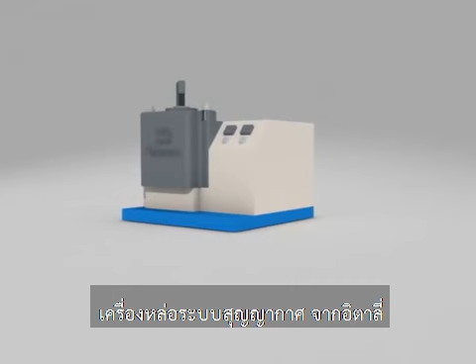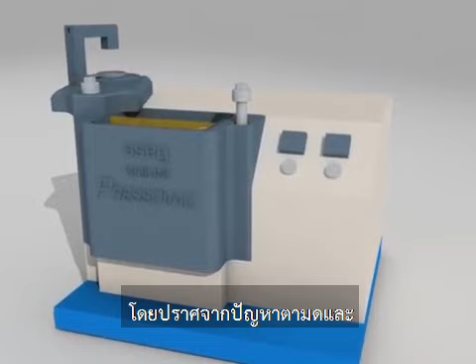The system used by our Pressovac series casting machines was specially developed for dental labs where casting perfection is absolute. Casting pieces have a very smooth surface, a very dense molecular structure, and are without defects like improper filling, porosity, and shrinkage.

Metal is inserted into the crucible and the flask positioned on the cradle inside the casting chamber. The casting cycle is fully automatic.

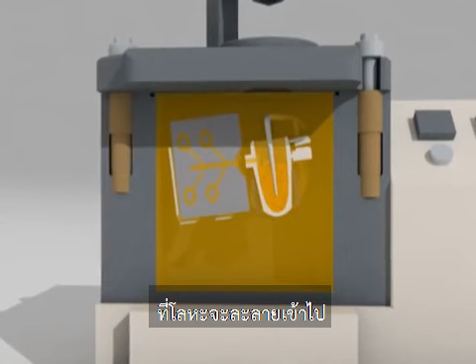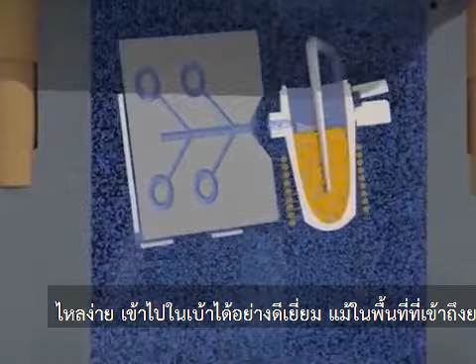The casting chamber is fully evacuated by vacuum before melting, followed by helium gas supply to create an inert atmosphere. Helium gas has an excellent gas fluidity, which provides a cleaning effect of the molten metal and mould, and guarantees a smooth filling of metal even of the most intricate patterns.

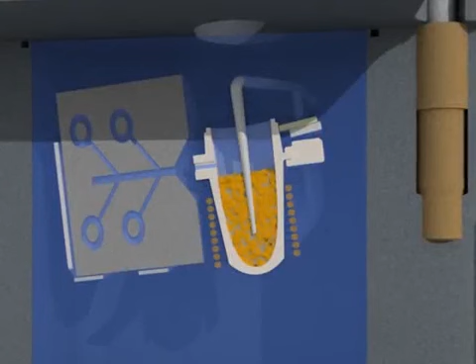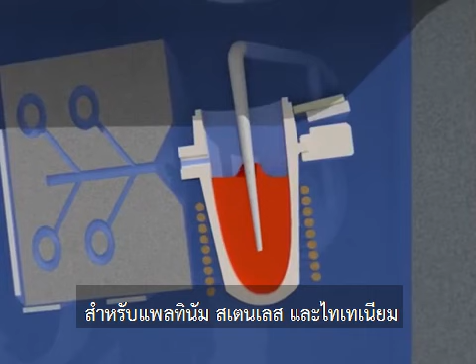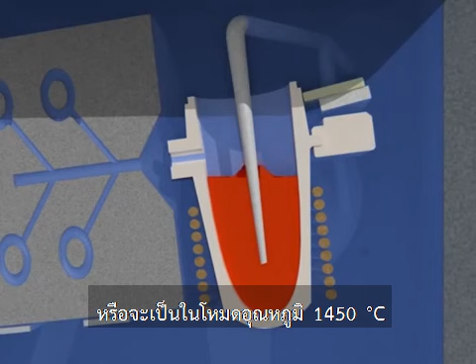The casting temperature is attained, and low-frequency pulses are given to vibrate and mix the molten metal, keeping it homogeneous. Temperature is controlled by an optical pyrometer up to 2100 degrees centigrade for platinum, steel and titanium, and by an immersion-type S thermocouple inside the graphite crucible up to 1450 degrees centigrade for gold, silver and bronze.

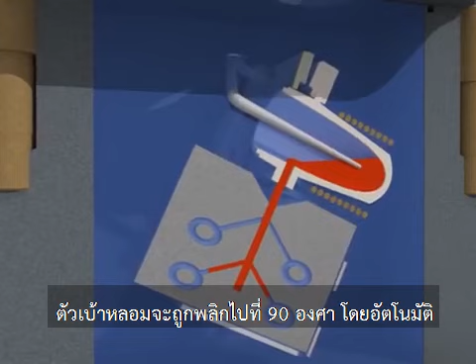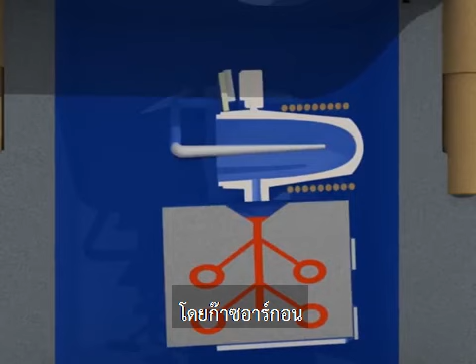At this stage, just by pushing a button, the whole crucible and flask system will automatically rotate through 90 degrees, and the metal, once poured in a homogeneous and controlled way into the flask, is automatically pressurized to 4 bars by argon gas.

This high and quick pressurization is indispensable to obtain a proper and homogeneous filling, even at low metal flask temperatures for gold, silver and bronze alloys, and, above all, for platinum and special steels which have a very narrow melting interval, thus a very quick solidification.

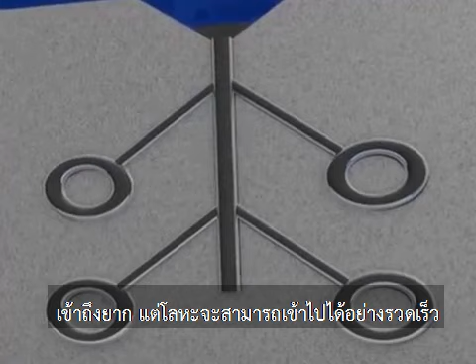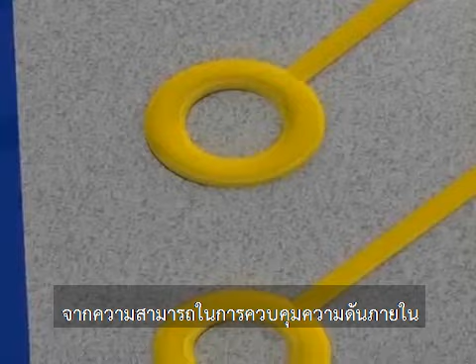This results in a very smooth surface due to the effect of the vacuum, and a dense, well-compacted casting due to the overpressure of 4 bars, which benefits both thick and thin sections.

In most of our competitors' machines, the metal cannot be effectively pressurized up to 4 bars since the machine structure is weak and gas pressure is slowly applied to the molten metal after pouring.

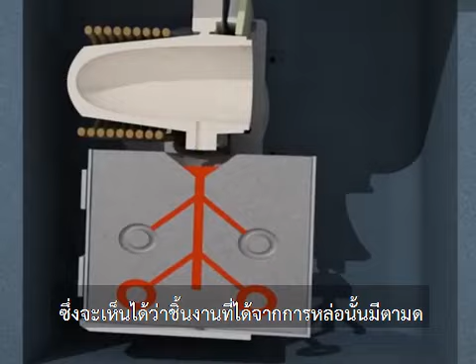This weak and slow overpressure leads to a raising of the temperature of both metal and flask in order to obtain a proper filling of the flask, with the obvious consequence that casting pieces will have porosity and a very rough surface due to the very high temperature.

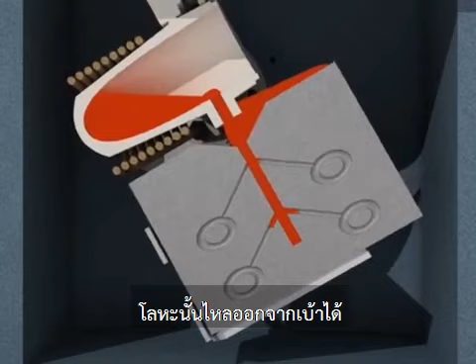Furthermore, in the competitor's machine, the casting tilting system is manual. It's not constant, nor homogeneous, and this leads to either a slow pouring, which will cause improper metal filling, or too quick, and metal will be spilled outside the flask.